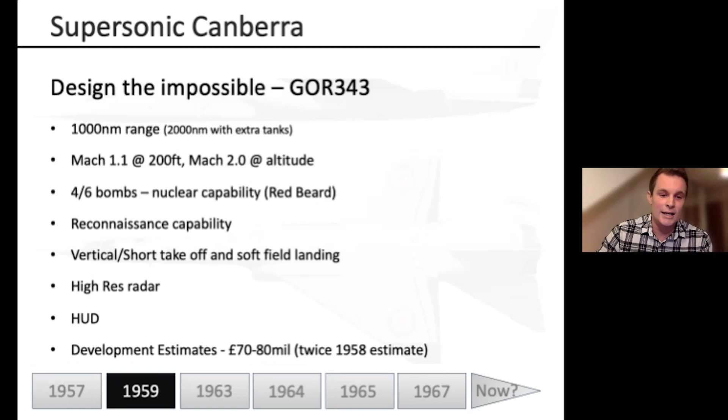We talked about this high resolution radar, this reinvention of a new radar. Basically, it would have a head-up display, and already the initial costing, as I said, was 15 to 35 million. The development estimates in 58 had already doubled to 70 or 80 million, and it obviously turned out to be far more than that.

It was also meant to be flown by a two-man crew. So one could say that looking at that requirement spec, the writing was on the wall of where this project was going to go. It was facing a huge challenge from day one.

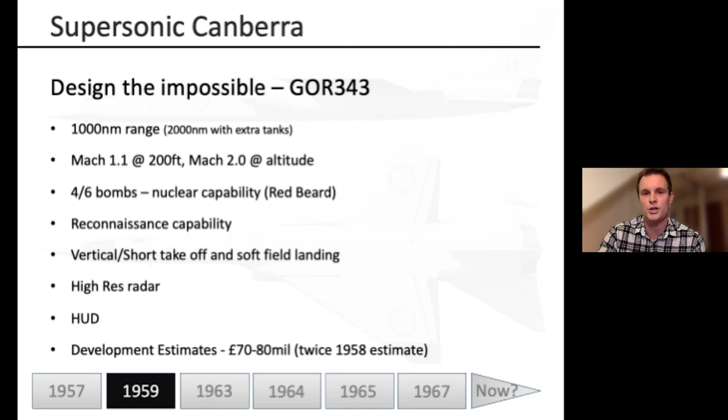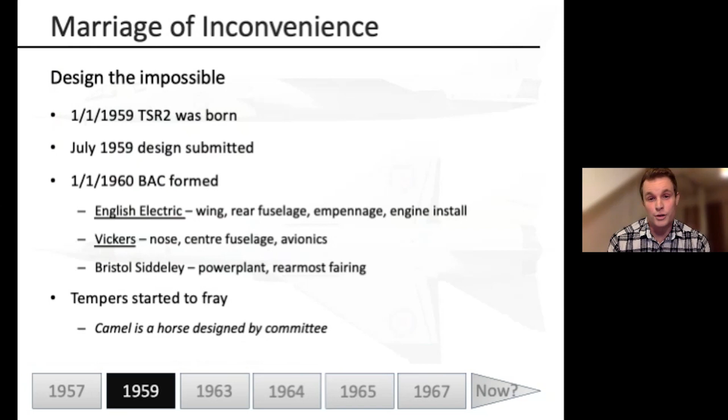Right, so the marriage of inconvenience. As I mentioned, the government were insistent that the companies banded together. Now, on the 1st of January 59, TSR-2 was born. Designs were submitted in 59, and on the 1st of January 1960, BAC, British Aircraft Corporation, was born. Now, BAC was born between Vickers, English Electric, Bristol Airplane, and Hunting Aircraft Company, but they had a number of contracts, and this was the contract being worked by Vickers and English Electric.

So what they did, they split up the design requirements between the companies. English Electric would look at the wing, rear fuselage, empennage, and engine install, and Vickers would look at the nose, centre fuselage, and avionics. In the end, Bristol Siddeley won the contract for the power plant and an Olympus engine, and they basically designed a brand new engine for the TSR-2.

Already tempers started to fray. The two companies didn't see eye to eye from the off. They thought that the amalgamation hampered progress. You know, they each had their own heritage in aircraft design and weren't used to playing with other companies, which, looking back, I completely understand.

And not only that, but the way that this project was set up, it meant that the MOD and the MOA, the MOD is the Ministry of Defence, the MOA is the Ministry of Aviation, they were very much in control at every turn, despite having BAC as the owner. For example, most of the subcontractors reported directly into the MOA, not BAC.

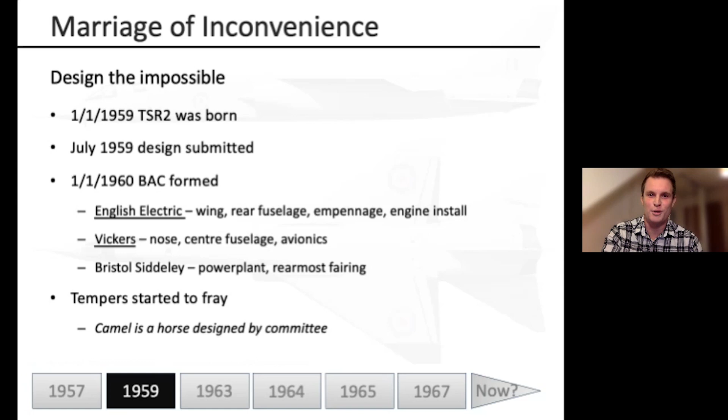So they were trying to pull this incredible project together, and they didn't even have control of a lot of the subcontracted components. And I believe the phrase "a camel is a horse designed by committee" has never been more true than for something like the TSR-2.

So winding the clock forward, we're looking at really the 4 years of design that went in between 59 and 63, maybe tickling into 64. For those who aren't aircraft designers like myself, I thought I'd talk about some of the greater challenges, the technical challenges that the TSR-2 really posed.

We mentioned this short field landing and rough field landing as well. This was difficult because you're designing an aircraft that has to fly at Mach, which means it needs to carry a lot of fuel on board to be able to actually complete a bombing sortie. So you've got a very heavy aircraft, a very big aircraft, and you're trying to land it on all sorts of surfaces, whether it's fields or beyond. This was mainly put in the spec because the ministry were worried that the Russians would knock out airfields, and so they had to have an aircraft that could handle adverse conditions if the airfields are under attack.

So it's a really interesting design problem, and they had lots of issues with the landing gear. In the end, they had something called a double cycle closing, which is when the landing gear were down, they would actually close a lot of the periphery flaps around the landing gear to reduce drag, and all these things just add an extra layer of design complication on top.

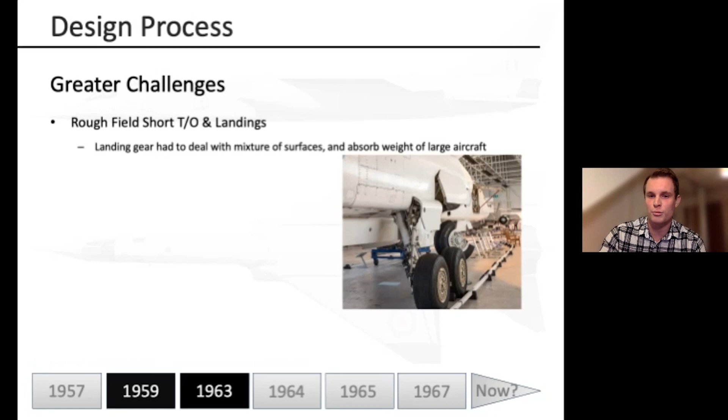Looking at the wings as well, designing an aircraft for supersonic flight and slow flight are two contradictory principles. When you're looking at fast supersonic flights, looking at something like Concorde, which I'm sure everyone can picture in their mind with the big delta wing, and English Electric's Lightning, you tend to have a very swept angle. Now this was because it helped reduce drag at high speed. So having a wing that would perform at supersonic flight and also at low speed was an incredible design challenge.

And the TSR-2 got over that by using something called blown flaps, which is where you pipe off some of the compressor air from the engine and you pass that through ducting over the flaps, and that helps lower your stalling speed. It gives you the ability to land safely. And talking about that short takeoff and short landing, you need that element of slow speed to be able to stop the aircraft in a timely manner as well.

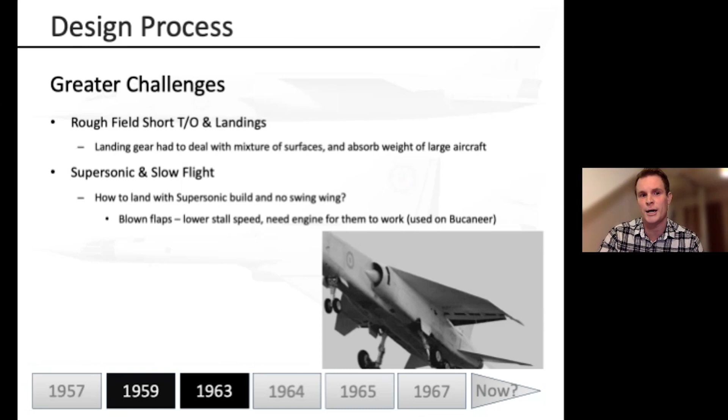There were also revolutionary avionics. There's a slide on that coming up, which I'll go into a bit more detail on, but putting an aircraft through low-level terrain at very fast speed using the avionics of the day would have been probably an insurmountable challenge, which is why they had to redefine the rulebook on avionics design, which is fascinating.

But to be honest, one of the biggest design challenges that the TSR-2 faced was the management. There's this discussion of an American style management coming in, which was a bit more rambunctious, I guess is the word, a bit stronger willed. And there were some fascinating stories that came out. One of which was there was a meeting going on at the MOD, and the chair sat down. He looked around the room in these big meeting halls in St Giles's in London, and he asked for a count to be taken because he thought there were a few too many people there.

The count came in at 58 people at the meeting, in a design meeting. So he said, "This is insane. We're not going to have a meeting under these circumstances." They organised another date to have the meeting, and he requested that only necessary people attend the following meeting.

Wind the clock forward, the next meeting comes around, and there were 61 people at the next meeting. So designing an aircraft under that, doing anything in those kind of conditions is incredibly difficult, let alone the technical challenges that this particular project held.

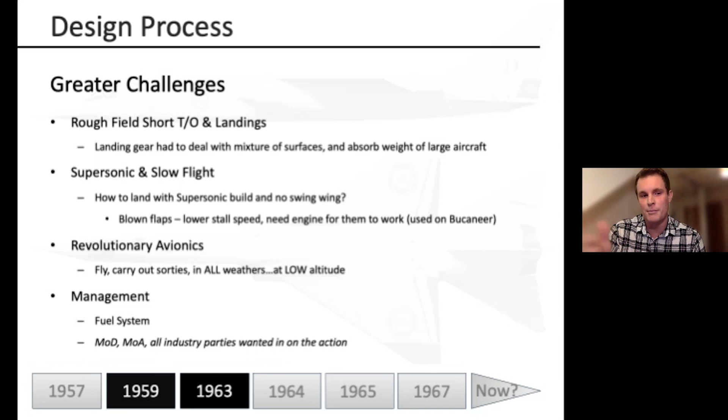So the power plant was really a bid between Rolls-Royce at the time and Bristol Siddeley. Both engines were assessed. In the end, Siddeley was awarded the contract in January 1959. Now, this came as a surprise to everyone in the industry. Rolls-Royce had put forward an engine that was flying, for one. It had achieved its airworthiness certificate. It was a proven engine.

And as Roland Beamont says, you should never mix a new airframe with a new engine because you're asking for trouble. Too many variables. Engines are very difficult things to get right, as are aircraft. So the challenge was kind of set very, very early. So what happened? The MOA requested an Olympus 22R, is what we'll refer to it as from here on in, but it was the Olympus 22R twin spool jet engine.

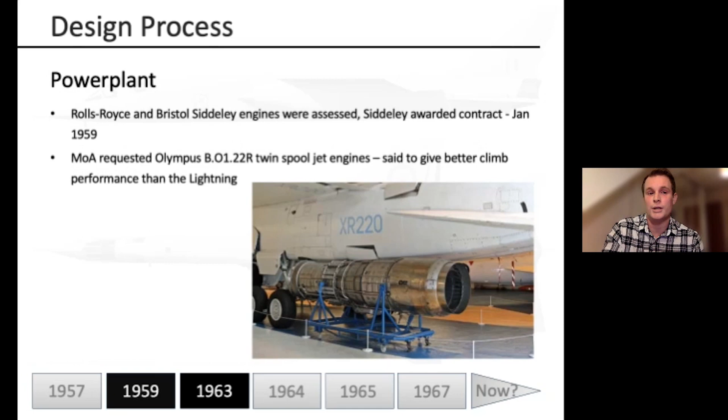Now, they had taken what was a 100 series engine that was flying successfully on the Vulcan, and that was putting out about 11,000 pounds of thrust, and they were making this engine supersonic worthy. So this was the first twin spool engine of its day. Adding a spool, adding a kind of a low pressure system into an engine is not an easy thing to do. You add a huge amount of design complexity and risk when you do that.

And when Rolls-Royce designed the 3-spool system in 1972, it bankrupted them. So that gives you an idea of the level of challenge that they were dealing with at the time. Regardless, they pressed on with it. This was going to be the first Olympus with reheat as well. So reheat is the afterburner. They had to increase the LP shaft to accommodate for this new kind of twin spool design, which led to its own issues of vibration, mainly from reheat overfueling.

But what's amazing is they took an engine that had 1 spool that wasn't designed for supersonic, that had 11,000 pounds of thrust, and they redesigned it to 20,000 dry thrust and 30,000 wet thrust, so with afterburner. So they tripled the power of the engine. All of this was on an engine frame, the 100 series, which had known issues as well, which later cost them dearly, which we'll talk about.

Not only this, but testing an engine like that hadn't been done before. So over at Pyestock in Farnborough, which was where the testing facilities were, they had to build a new way of testing a supersonic engine like this. And to do that, in particular, they had to heat up the supersonic air going into the engine to reflect the temperatures the TSR-2 would see in flight. None of this existed before. So they were rewriting the rulebook on every level.

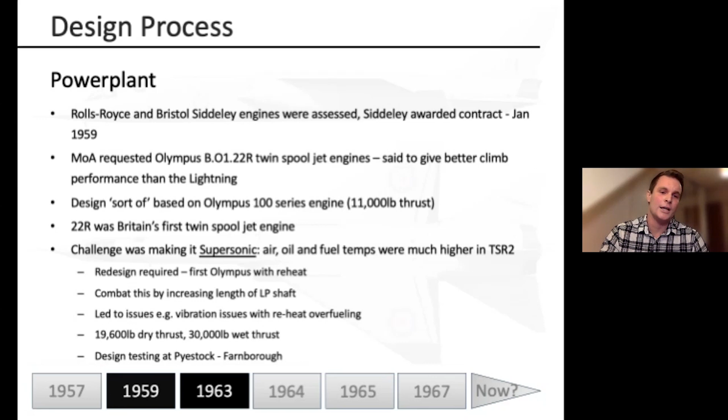Alrighty, so the cockpit. The cockpit's another great example of this challenging management environment that surrounded the TSR-2 and these battling companies with the government. They would talk about 60-person meetings and days to decide the location of every switch and whether the switch should have a label on it and what that label should say and all the rest of it. Compare this to Roly Folk, who was the Vulcan chief test pilot, who fought adamantly, and won, to design the cockpit himself. And you know, that makes a huge amount of sense.

When you're the customer, you should be designing the interface. It's not just important in how you do your job, but it could save your life. So it's incredibly important to get that insight from the people who are going to use it, and that didn't seem the case with the TSR-2. In fact, in an interview with Beamont, the chief test pilot, he spoke about how they had to change a few things before the first flight to make sure it was actually safe to fly.

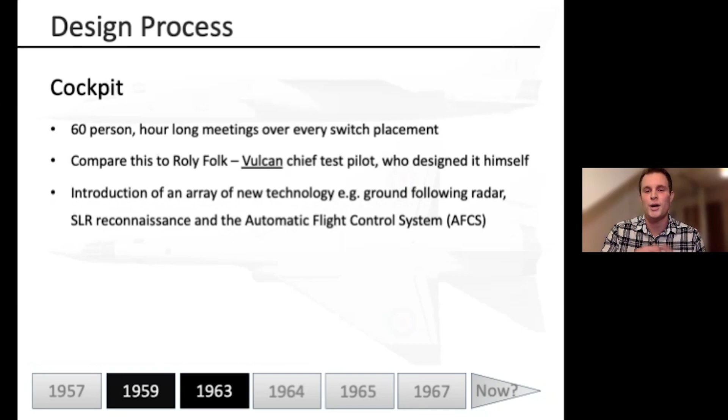Now, the TSR-2 did have its own challenges where they were introducing a huge amount of new technology, which was all reflected in the cockpit setup, and I'll pop an image up in a second. But new things that we've mentioned very briefly, like the ground following radar, and the AFCS, the Automatic Flight Control System, all these things were new, so they had to find an ergonomic home for them.

But to compare, on the left, the TSR-2, you've got the pilot's cockpit in the top left, and then the navigator bottom left. Compare that to the Vulcan. There's a very different feel of ergonomics, I guess. And from our lecturer last month, human factors comes into it in a huge way, because certainly when you're flying, there's enough going on to not need to know where to find every dial that you need. So intuition helps a huge amount, and they're two very different setups, that's for sure.

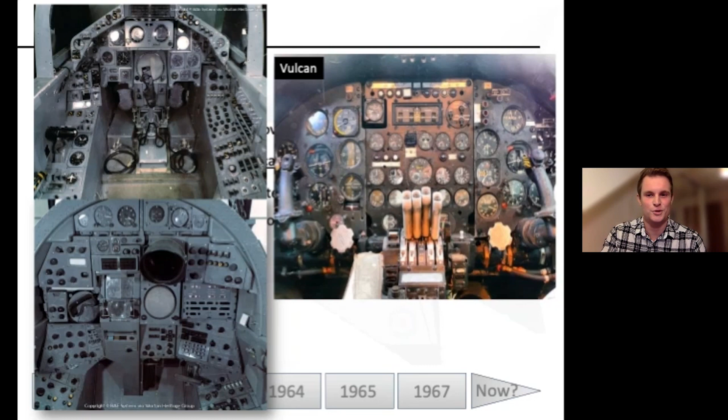And that's Bee Beamont, a name that I'm sure you'll hear in the coming slides quite a lot. He was the chief test pilot. He's given some fantastic interviews about the TSR-2 since. But this comment is really around understanding the voice of the customer. If you're designing something for somebody, you best ask them what they want. And that's something that they never quite did with the TSR-2.

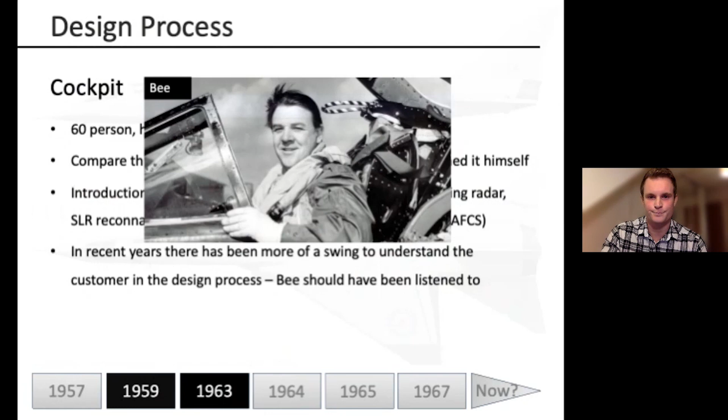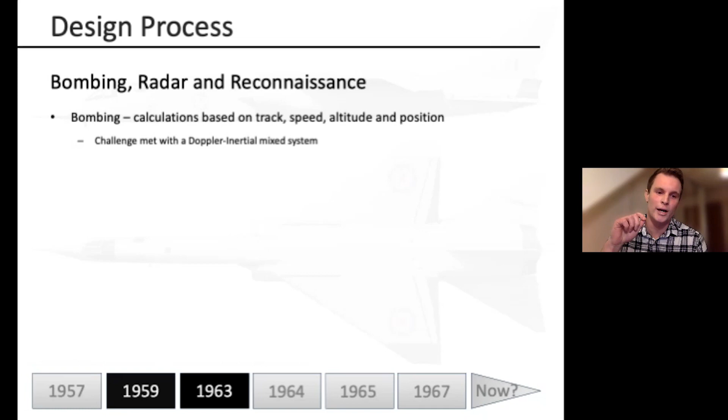Now we're getting into the real technical bits of the bombing, radar, and reconnaissance. I'm not going to go into a huge amount of detail here, one, because I haven't actually seen the kit myself, so it would be remiss for me to do that, but hopefully to give everyone an idea of how much they were changing with this aircraft. The bombing, certainly looking back to World War II, was far more simple than what was planned for the TSR-2. They were trying to create something using a system called the Doppler inertial mixed system, which would calculate based on track speed, altitude, and position to ensure an accurate delivery of the payload, something that hadn't been done.

FLR, which was brand new, was a forward looking radar, so it's a terrain following radar, and it comprised an altimeter, angular stabilization, and airstream direction detector. So basically it was taking in all of the information surrounding the aircraft. Bear in mind, it could be flying at Mach 1.1 at 200 feet, taking all this information, processing it incredibly quickly, and the ultimate goal was then to slave that to the AFCS, the autopilot, for want of a better word, and the accompanying HUD for the pilot.

So not only are they redefining what radar meant for an aircraft, but they were integrating it into systems that also didn't exist at the time. It was incredible what they were trying to do, and not forgetting the time frame that they were asked to do it in. From 59 to 66, it's insane. In one of the books I read, someone gave a lovely comparison of back then. The general view was the plane was very much 95% hardware, 5% software. And it's interesting if you compare that to nowadays, where it's probably the complete opposite. A huge amount of the investment and design time goes into the software to make the plane flyable. Interesting.

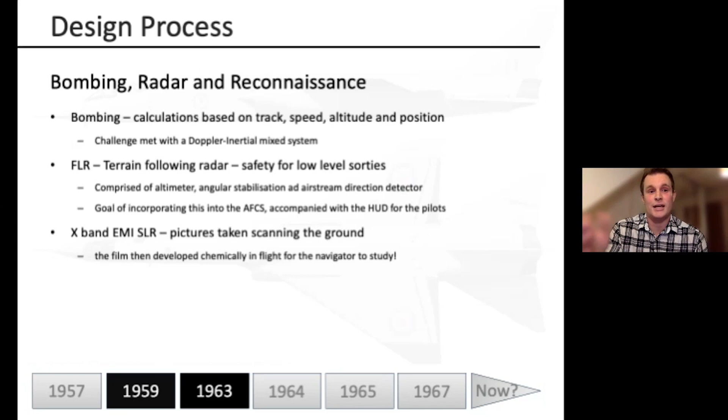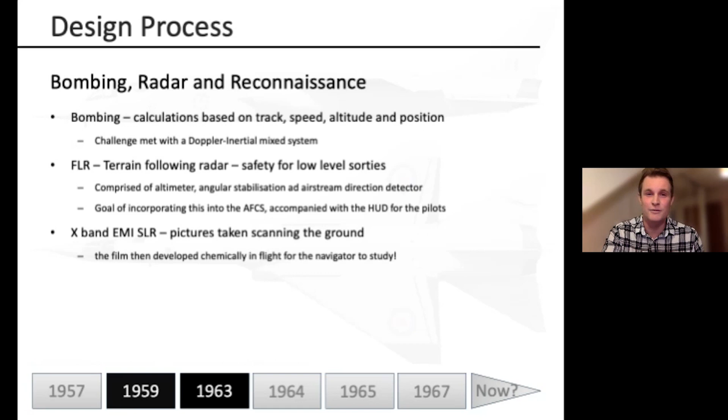They had a bit of kit that the camera roll would pass through. The chemicals would do their stuff on the camera roll, and the navigator would be able to study the results in flight, which is incredible. To think of an aircraft pulling G through hillsides and having these chemicals swishing around, developing film down below.

Amazing. And it didn't actually stop there, because they also wanted to introduce, I think it's Ferranti, the company that were responsible for it, were looking at developing the moving map display. So what this was, film photos of large swathes of Europe that they were trying to get inside the cockpit so the navigator could look at real photos based on location to understand exactly where they were aiming and what

the area looked like. And not only that, but they were trying to develop it so it would slave to the radar. So the radar would be able to tell this moving map display and vice versa exactly where they were, to give the pilot and the navigator real-time imagery of what they were looking at, which, again, didn't exist. This is long before the days of Google Earth. And I think that's certainly something that's worth commenting on.

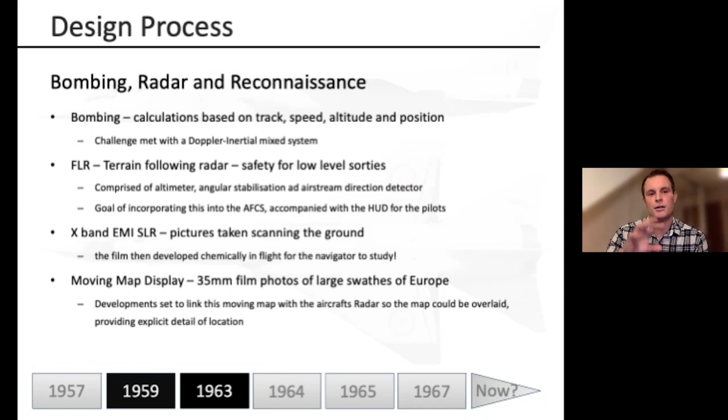Certainly with these things, this is a time where analog was reigning supreme. Digital computers were starting to get onto the scene, and the only way to run these were on some of the first digital avionics computers built into the aircraft. But for anyone born after the 1980s, it's easy to forget how much power we have in our pocket with an iPhone compared to the amount of ingenuity that went into designing these systems back then.

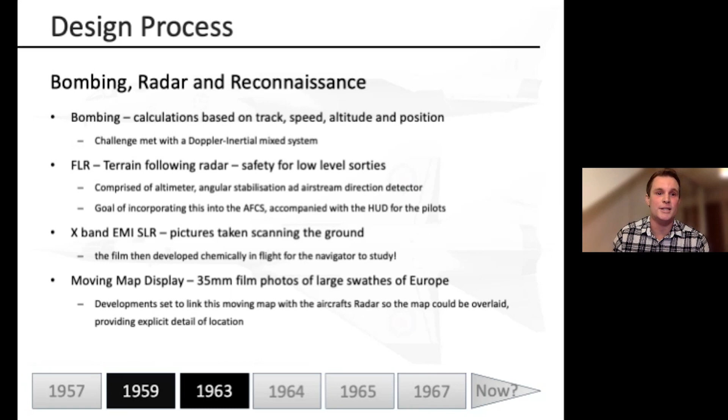Alrighty, so moving away from the aircraft, trying to set the scene politically a little bit here. The TSR-2 was getting more expensive as the days went on, but it was promising to be a potentially very exciting aircraft. One of the big competitors for it was the Blackburn Buccaneer. Now this was Lord Mountbatten, he was a Navy man all his life, and the Buccaneer was an aircraft carrier plane. It was his preferred choice because for him it was in-house, if you like.

It was said that the government held contempt, that they never really considered the Buccaneer for the TSR-2. As I said, the RAF disputed that, but they did very closely look at it. What was interesting, as I said, with the Buccaneer is there were worries that it wouldn't be able to offer the same flying advantages the TSR-2 would.

Now, Lord Mountbatten, so much so was his adamancy over the Buccaneer, he would pretty much tell anyone who would listen, in this case mainly the Australians, who play a pivotal role in this story in the following 18 months. He actually encouraged them not to buy the TSR-2. Here, they kind of said that Mountbatten, who had planned a trip over to Oz in 1964, would carry 5 models of the Buccaneer and 1 of a TSR-2, and he'd put them all on the desk and say, you can buy 1 of those or 5 of those. What would you decide?

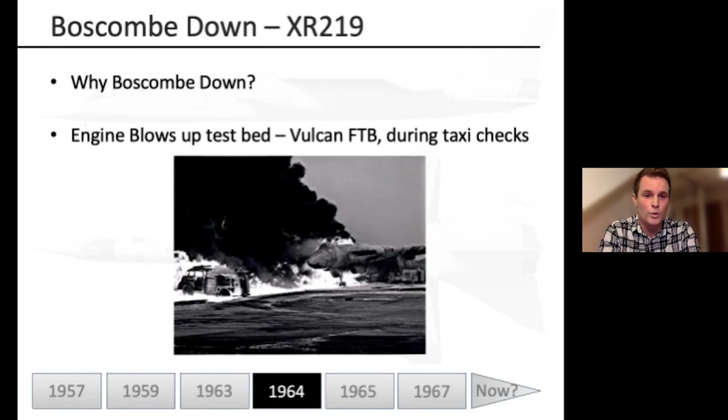It wasn't all plain sailing. As I mentioned, there were known engine issues that ended up blowing up the Vulcan flying test bed. Now, this was during taxi, not during flight, which was a relief, I'm sure, for the pilots. But there were initial worries with the engine. Taxi checks were completed on the 6th of May, and the first official flight happened on the 27th of September 1964 at 15:28. It lasted just under 14 minutes. Now, the bit of the story behind this is that the aircraft wasn't in a safe state to fly because of these known engine issues.

What was interesting is there was an election a few weeks after this flight, so it was very much a political move to say we need to prove to the current government. There was a public feeling that the Tories were going to be out and Labour were coming in. It seemed almost known at the time. So they had to prove that they had a viable product. Bee Beamont took the risk on and said it was worth the risk, despite the engine issues, and they took it for this historic first flight, and that's the photo there of it disappearing into the skies for its few circuits around Boscombe Down.

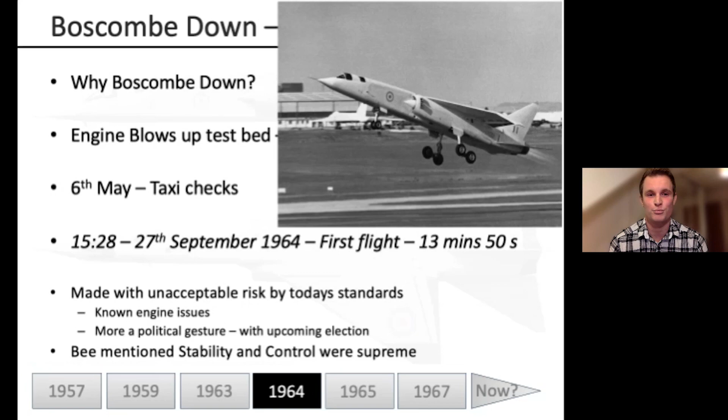What was interesting is the feedback from the pilots was at an early stage very, very positive. They said it was an incredible aircraft with supreme stability and control, despite just coming off the design paper, really. And that's a photo of XR219 down at Boscombe Down. A lovely image, actually.

So quickly intercede our flight testing with this important announcement that the Labour government was elected. Harold Wilson was made the PM, and he very quickly inherited an £800 million deficit. But this was a deficit on trade, not of internal spend. Unfortunately, that didn't seem to change the direction the government went in, cancelling projects internally to try to attack a deficit, despite it being a trade deficit. What was also interesting, one could say ironic, is that a Department of Economic Affairs was set up within the government, which was designed solely to draw up a national plan to promote national investments while actively cutting national projects.

So who knows? What was interesting is that a lot of the lead economists at the time suggested to Harold Wilson that the way to rescue the economy out of this debt was to devalue the pound. Now, Labour had previously done that in 1949, and he didn't want the Labour Party to be tagged as the party of devaluation. So instead, they sought to reduce this deficit through the culling of expensive projects, as I mentioned. Ironically, or sadly enough, the pound was actually devalued in 1967 anyway, so they ended up doing both.

Bit of feedback from Beamont there. He mentioned how beautiful the control was. This was on his first flight. He was able to relax and take his hands off the controls, which for a first flight must be quite nervy. That's quite impressive of any aircraft. As I said, on the 22nd of Feb, XR219 was flown up to Warton. XR220 was at Boscombe Down.

Now, unfortunately it actually fell off a lorry. The lorry jackknifed and the fuselage fell off. Now it wasn't the end of the world. They quickly sorted out the delay, but what was unbeknownst to them was the timing of these issues. They had completed initial taxi trials and were getting ready for engine trials and first flight in March and April of 1965. And they will find that that's particularly critical timing.

It was a very expensive project. You know, if we've learnt anything, it's the fact that they were trying to put everything new and exciting in this one airframe. That takes time and it costs money.

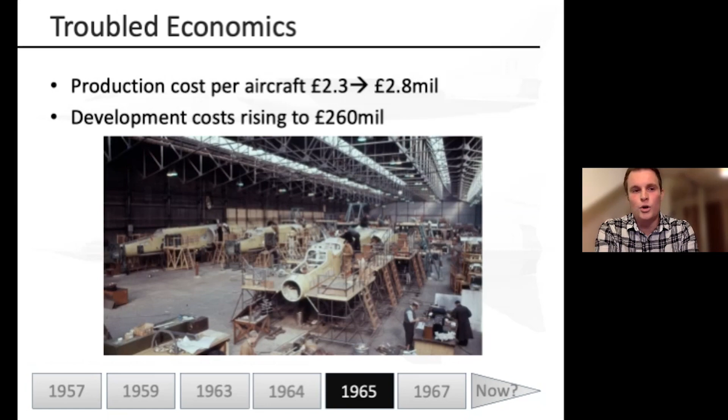Not only that, but they were trying to find buyers for the aircraft. The RAF had planned to purchase 150, which seemed like a lot at the time, certainly. The Australians were toying with, I believe, around 24. I've heard some people say 30. Unfortunately, within a few months, they had actually changed their minds and instead went down the F111 route.

Now, this was widely considered as the death knell for the project. And Harold Wilson publicly kept quoting this figure of development costs of 750 million, suggesting a potential saving of 300 million in cancelling the TSR-2 and going for the F111. So they were setting their stall out, and they were trying to prove the economics of it made sense. At this point, the TSR-2 was costing roughly 4 million a week.

Also, looking at the wider picture here, the British East of Suez role was being diminished as the empire was getting smaller. Within the last few years of 65, 20 colonial countries were becoming members of the Commonwealth. So there was a removing of airfields and access to supply routes that the TSR-2 could have serviced and flown. And with Polaris coming online with the Americans, a nuclear deployment vehicle like the TSR-2 was becoming potentially redundant.